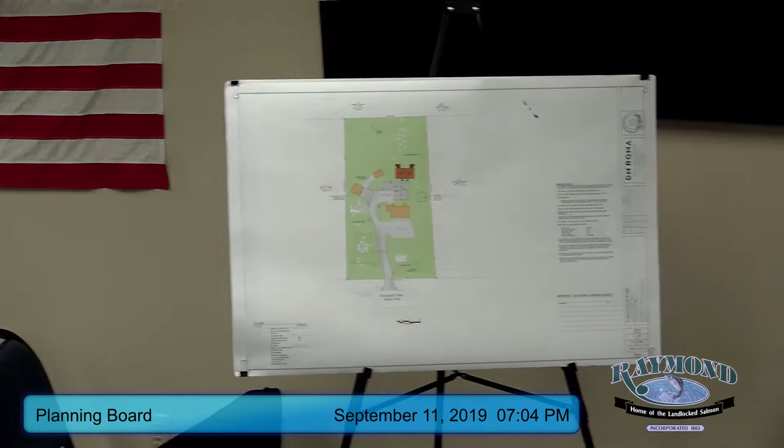The property currently has an existing two-family duplex structure on it, which is the kind of light brown building you see in the middle of that diagram there. There's two other structures on the property that are outbuildings, one's a garage and a shed structure, again the lighter colors there. The lighter gray color represents the existing driveway that comes in and serves the development.

So there's 2 levels to this existing duplex building. There's a parking area on the lower level, and there's a driveway that comes up around to the upper level for parking up there as well.

The proposal is to add an additional duplex building on the rear part of the property. We're going to be widening out the driveway to accommodate two-way vehicles and emergency vehicles better, get it out to 20 feet wide, and we're going to add parking spaces to the pavement extension in the back. We're adding 6 spaces there because we're kind of displacing a couple of vehicle parking spaces where they try to use them. They have exclusive use to that driveway in the back, so that's going to now be a kind of dedicated driveway for additional dwellings. So we're adding those spaces to the bank of parking in front of the new building.

This applicant is the same applicant that came forward and proposed the 2 duplexes on the lot to the east of this, which the board had approved. So that project hasn't started yet, but this is kind of a similar arrangement. In this case, the building is going to stay, whereas in the other case we were having 2 brand new structures.

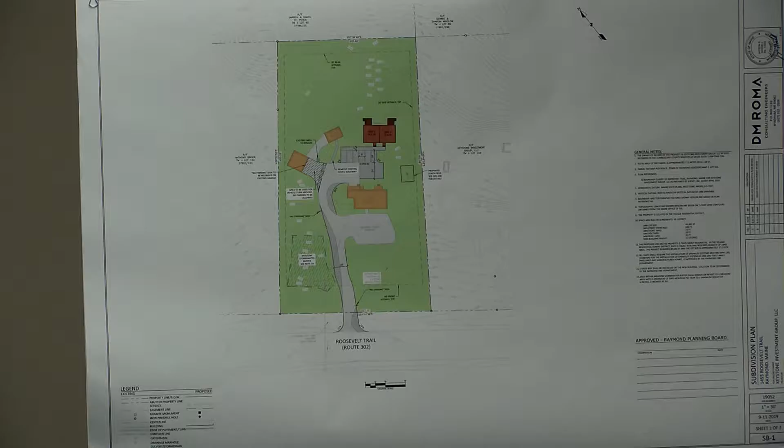We've had a septic system designed in this location. If you recall, the replacement leach field on this property is in this location, so we've got two septic systems in the same general area here, with the wells flanking on the outsides.

This site is much less steep than the other site was. I know we had some concerns about grade on the other site. We do continue to climb up the hill here, but we have a much flatter transitional period along the roadway, and a slightly steeper area here, but none of this driveway is as steep as what was next door, so it's a better situation.

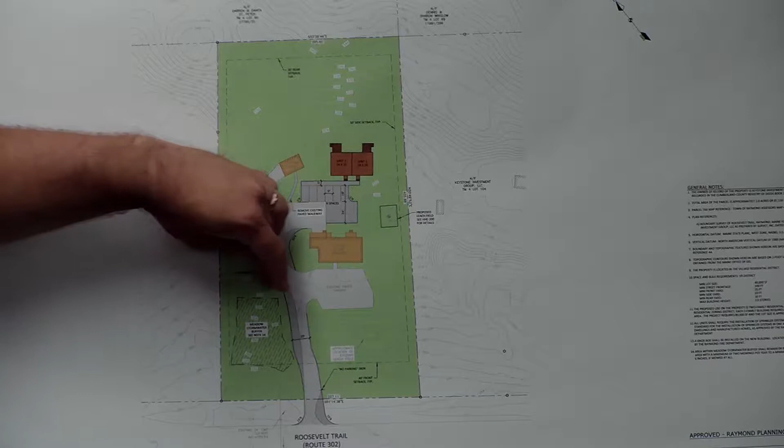Stormwater still remains to come down the hill. We're going to divert it around the outside of this building, and as it comes down we'll direct it to a level spreader in this area, which is predominantly grass, not as heavily wooded as the other site. So we're sizing this as a meadow buffer, even though there are some trees, using the meadow buffer methodology, which requires longer berms and a longer flow path length. We're directing as much water as we can coming down the hill into that buffer area.

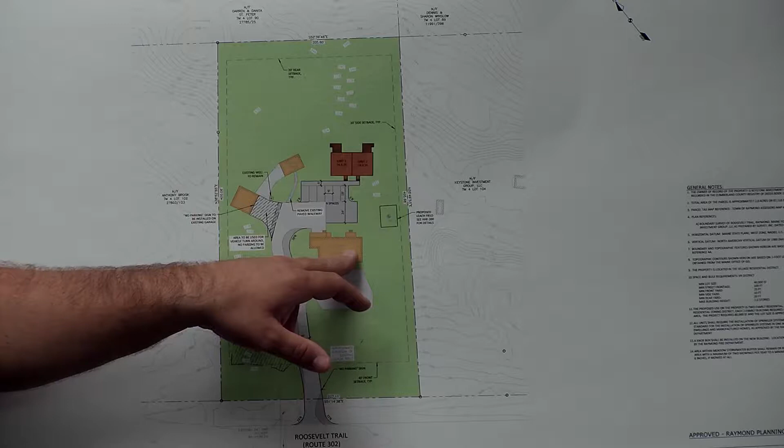This is the existing leach field for the lower building, which is going to stay, so the new leach field will only serve the new dwelling. Other than that, it's a somewhat similar project to what was right next door, but I'm happy to answer any questions.

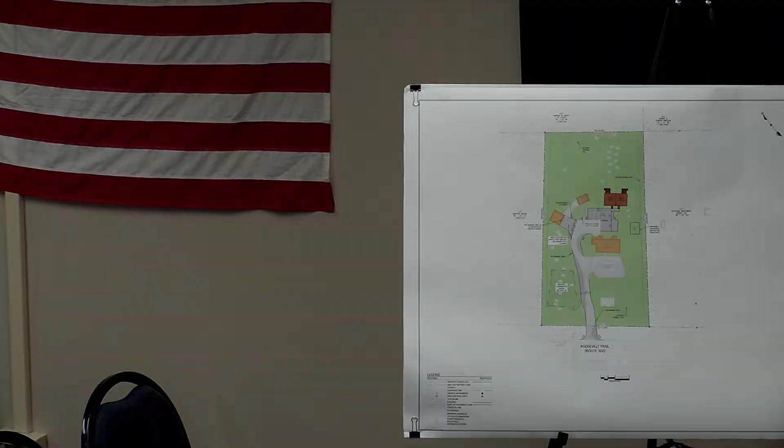We received comments from our staff. Do we want to address those, Jim? Yeah, we looked at this, and to Dustin's credit, it's very almost identical to what we had just approved on the abutting property, so a lot of the comments are very similar in nature.

Based on the sketch plan, we'll need to show proof of the wastewater system. The only other question I had, similar to the other side, is do you think we'll need to drill an additional well? Before we weren't sure whether we had capacity, so if we do, we need adequate separation between that and the septic. I don't know if there's any separation requirement for the two septic systems being close. I don't think there is, but okay.

No, to your point, I know you've got a buffer. We didn't see that on the initial sketch, so we'll want to see how you're going to handle erosion control and stormwater runoff. Sounds like you have a plan in place for that.

I think the biggest issue, though, is that even though the grade's not as steep, in the fire department's comments we received, there may be some concern about the amount of area we have to turn around a fire truck. They were going to utilize that access to the garage as part of the fire truck turnaround. I don't know if that's long enough for the fire department. I think they have a similar comment of concern, so that may be something we just need to look at or work through with the fire department.

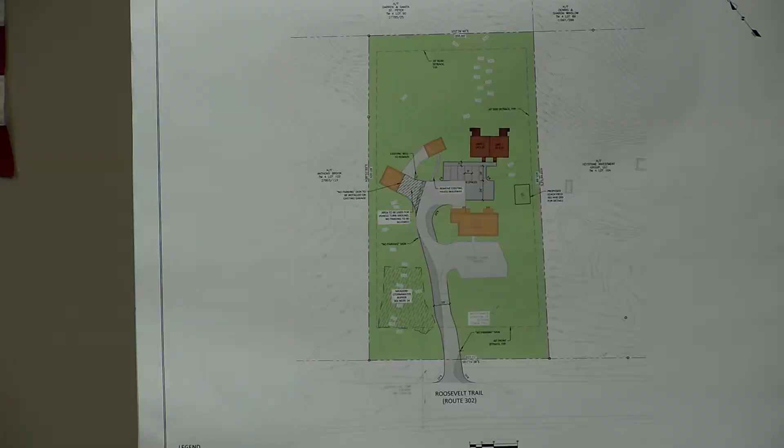As far as this design goes, we'd be looking for the same designs we did before: 20-foot wide paved width with small shoulders. I assume there'll be some kind of association, or whether that be all under one ownership for the maintenance. Yeah, single ownership, right? Single ownership, okay.

We'll want to see utility connections and services. Right now it's overhead power to the existing duplex. I think we prefer to see underground, but we just need to know if you're going to drop a pole in or how you're going to get it to that other duplex.

I don't know what the condition is, I haven't been up there, but I know we were going to replace the other culvert on the other driveway. I'm guessing these are probably similar in age. I don't know the condition, but we're probably going to have to extend that, so that's something to take a look at. Does it warrant adding another section of pipe, or do you need to replace the whole thing? That's the same as we had before on the other one.

Talking to the fire inspector Wayne, I think he's looking to have the existing duplex sprinkled. Definitely the new duplex will need to be sprinkled as part of our fire protection ordinance.

And then just delineating parking spaces and making sure we have enough parking spaces. And then obviously, similar to the other one, we'll just need to confirm what the E911 address will be for these units.

I'm guessing, what do they do on the other ones? A, B, C, D? I'm not sure if they've been addressed yet. Probably wouldn't until we got a permit. Have the same address? I don't know how that would work. We'd have to talk with the 911 addresser, and we'd probably have to see what would work up in there.

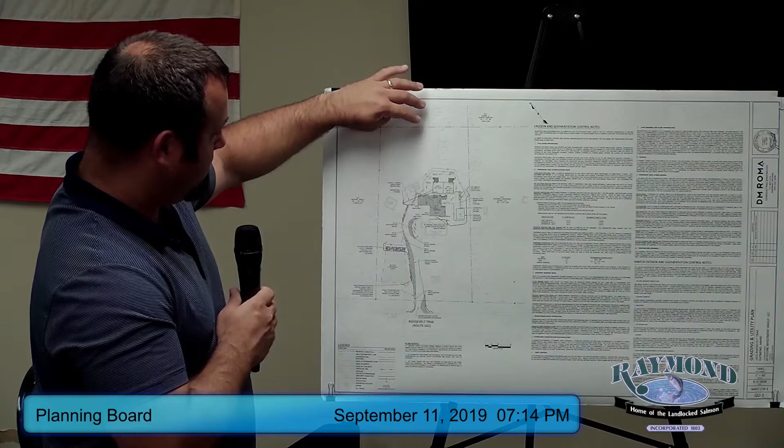This plan wasn't in your packets, but I just brought it with me tonight to facilitate some of these questions. So our initial intent was to bring the water around the building here and then run it over the driveway, get it off the pavement quickly in this area, and then bring it to the level spreader.

Because this would be a pretty long culvert to get underneath all that area. Well, yeah, I mean it looks like it'd probably be 35, 40 feet long.

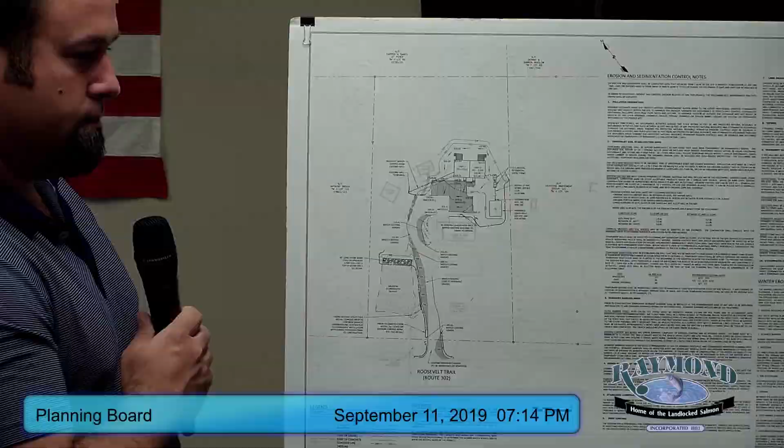To your point though, Bruce, I know on the other one we had a discussion about an under drain in the back of those units, because you have all that water coming off the back of the hill. So maybe that might lead us to make some kind of drainage improvement.

I'm just concerned that all that water running across the driveway in a freeze condition is just gonna be a slippery mess. You might want to think about that a little bit. That's a good point.

As far as the driveway not being long enough to the garage, it's up to you to design it. I'm just wondering if you could shift all those 6 parking spaces 9 feet to the right and lengthen the driveway by 9 feet, and you'd probably have a 40-foot approach to the front of the garage instead of 30 feet.

The way we looked at it, and we'll make sure the fire department's okay with this, we thought this was going to work for most apparatus. If you had a ladder truck or something that needed big space, this area could work, as long as we strike this out so that this area remains a fire lane in front of the building.

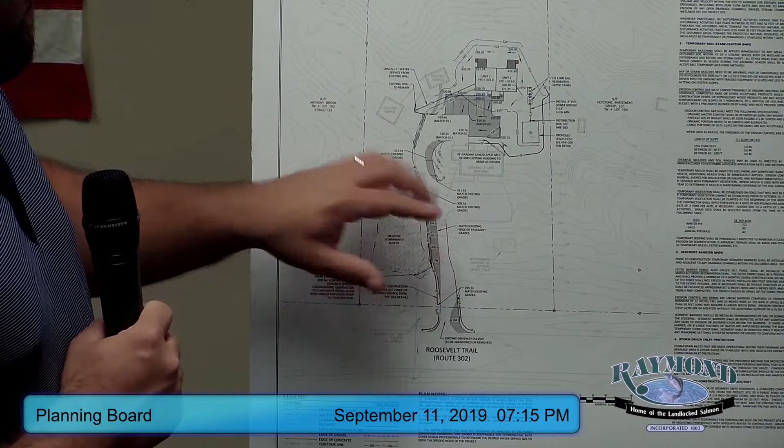The thought was that this could be used if necessary, because that way no one's backing out onto the road, as opposed to just pulling in front of the garage and backing up. You could back into this space and then come right out that way. Well, that's up to the FD.

And I think the thing too, with that lower parking lot, we'd have to see how it's striped, because people park on both sides of that, you may not end up with much of a lane, particularly with the water control, if that's a frozen condition in the middle of the winter. So that's all the more reason to consider how we're gonna handle the water coming off the hill.

Okay. Does anyone else have any questions or comments on it?

Okay, do we have any other communications from Jim? Not at this point. The only thing is, I know Bob's not here. One of the things, if he were here, he'd be looking to see how you guys are working on your comments about the road connectivity.

Ordinance revisions that we're looking at. I know we've been busy, so we haven't done our homework either, but I think that's something that when he gets back, he's gonna be poking the bear to get some initiation on. Coming into the fall is typically when we start looking at our ordinance revisions. So along with that, if there's other ordinances that you think need some sprucing up or have questions about, now's the time to start asking those questions.